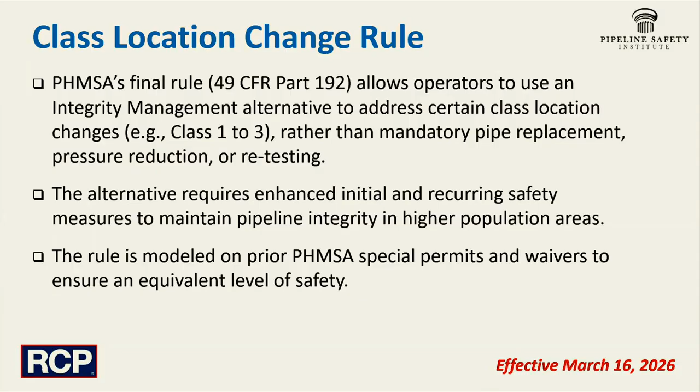So this alternative requires a lot of those baseline and recurring safety measures to maintain that pipeline integrity as the population increase has encompassed a previously designed and installed pipe. There's also these eligibility requirements for that applicability that we'll talk about. But first, I'll turn it over to Derek Wallace.

Thanks, Chris. I'm sure all of y'all are aware of most of our class location classifications, but we figured we'd give a little refresher on what some of those thresholds are that change our class. For our class 1 pipeline, we're looking at 10 or less buildings intended for human occupancy in that 660-foot buffer. For our next jump, it'll be our greater than 10 but less than 46. So you start hitting a little more urban areas.

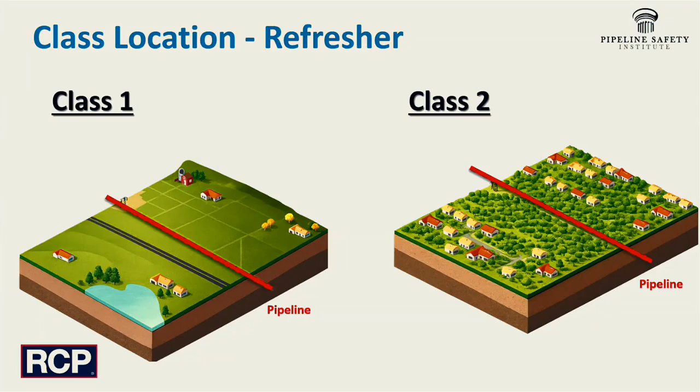And we'll jump to our next slide, in which we'll see our class 3, which is going to be more than 46 buildings intended for human occupancy, or if our pipeline lies within 100 yards of a well-defined identified site. So this could be a playground, recreational area, outdoor theater, a place that is occupied by 20 or more people at least 5 days a week for 10 weeks in any 12-month period. So obviously those weeks don't need to be consecutive. And as always, whoever's doing your analysis should verify occupancy on some of these buildings.

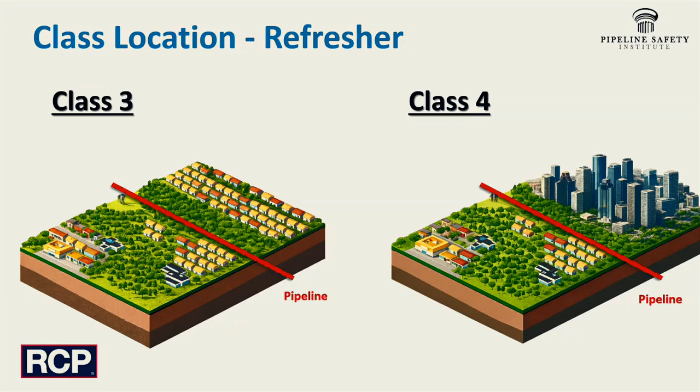Another one is our class 4 areas, and this is going to be our downtown metropolitan areas where we have 4 stories or greater. That'll bump us up to class 4. Then we'll jump over to an example we have of a class 1 pipeline. This is located just outside of Houston in Katy, Texas.

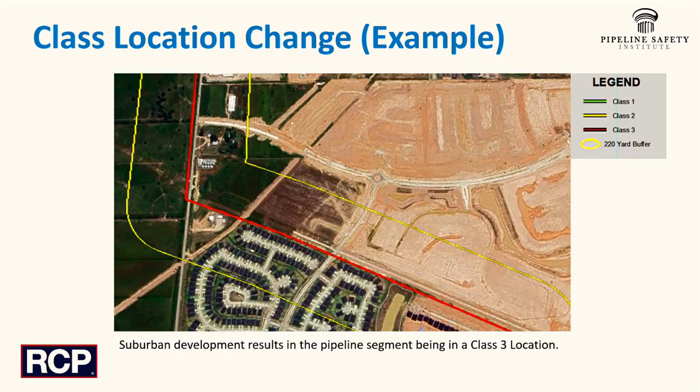And as you can see, whenever this pipeline was constructed, we were in fields and farming land. Then fast forward, as growth occurs, we're now dead center in a growing master plan community. So these changes happen quick. And luckily with this change that Chris will get into in this next slide, it allows operators some options. So I'll hand it back to Chris.

Thank you, Derek. Yeah, that change from class 1 to 3 happens rapidly. And that's what the special permit process was designed to address. And after 20 plus years of experience with it, I'm glad that PHMSA was finally able to codify this new section 192.611(a)(4). So we had a great example there of a class 1 pipe designed, installed, operated for some time at a 72% design factor for a class 1, but then it rapidly incurred a class location change. In this case, it was the top line going straight to a class 3.

And so the previous options were to reduce the MAOP per 192.611(a)(2), replace the pipe, or get a special permit. Well, that's now been replaced with the new 192.611(a)(4) method. Also, some areas incur slower change and may end up going to a class 2, and operators will typically pressure test their pipeline to the one class above pressure requirement. In this case, the pressure test was conducted to 1.25 times MAOP. And that's really the basis of a lot of this rule. That's another requirement, that the baseline pressure test per Subpart J be to 1.25.

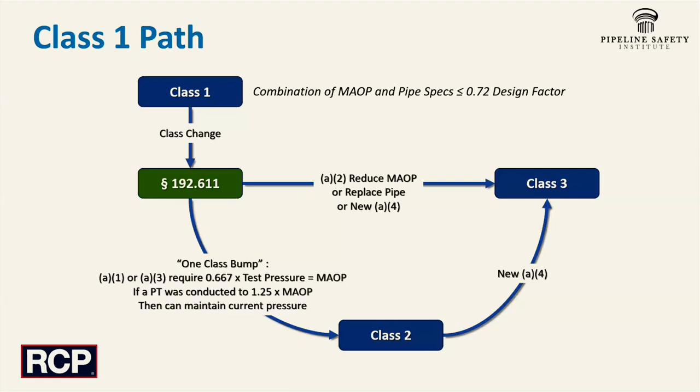Well, in that case, the operator could have taken what's known as a one class bump and maintained their current pressure as it went to class 2. But now as it grows more to class 3, they must implement the new (a)(4) to maintain their pressure. There's also some pipe designed to class 2. And if they incurred a population growth and a class change to class 3, there's a few methods that they could use to accommodate that.

The first one being the central line, which would utilize the new fourth method: I had a pressure test greater than 1.25 MAOP, and I could use the new 192.611(a)(4) methodology to get to a class 3 operation. Or if it was designed to class 2 and they had done the pressure test to 1.5 MAOP, they could utilize the one class bump and maintain their current pressure up into class 3. The other option, if they didn't have the 1.5 pressure test, is to reduce pressure commensurate with the design.

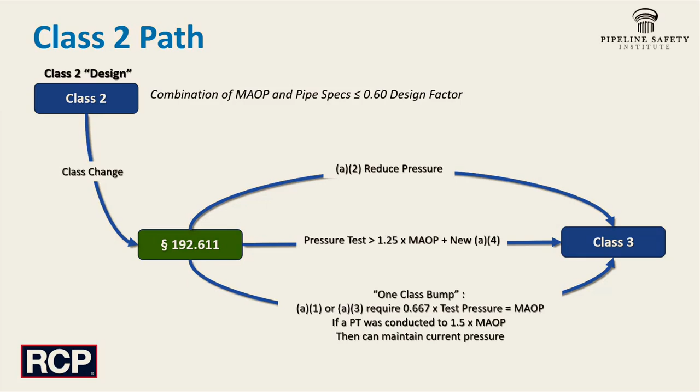So to get into this program, for it to be applicable, we have some new definitions. And I think within the rule, it talks about this gateway into the rule, and the reason the rule is designed the way it is. It's very efficient, and I think that's a really great thing. We are due some simplified, more efficient rules.

The first thing is that this eligible segment is going to be capable of being assessed with an inline inspection tool. It must be piggable. So we talk about a class 3 inspection area that's from the upstream tool launcher to the nearest downstream tool receiver. And so it must be able to be assessed by ILI.

Really, the improvements to the integrity management rule in Subpart O in the last 6 years, ending in 2022, and a lot of the success of the special permit has been the continued improvement of inline inspection to identify axial flaws, crack-like defects, and other integrity concerns, and remediate those prior to their resulting in a failure.

Some of the things that are not able to be utilized in this new rule to become an eligible class 3 segment is mainly done by omission. It can't be bare pipe. Bare pipe has never been considered part of an acceptable pressure upgrade as class has increased. And wrinkle bends. Wrinkle bends are very difficult to inspect with ILI, if not at all improbable to be able to detect the appropriate defects.

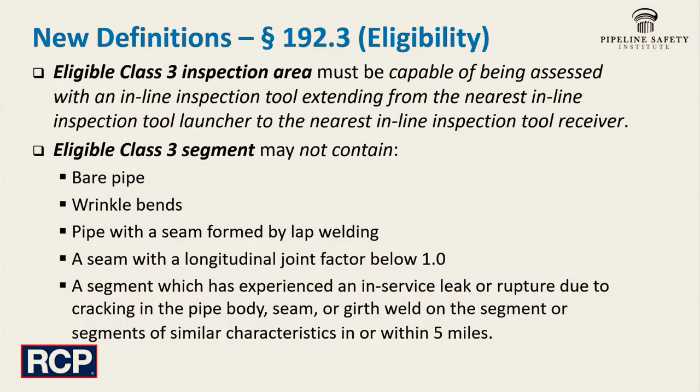And you'll see the effect of leaks and ruptures on this rule extensively towards the end of this discussion. Again, these criteria have been shown to be effective and provide safety in the fact that no in-service leaks or ruptures have occurred on segments managed under the current special permit process.

So let's look at A4. It's the new method. First off, it will be included in Subpart O in your integrity management program. That includes the risk assessment, the integrity assessments, remediation, and other activities that go on normally within an integrity management program. And then there are initial requirements, and here we start seeing the dates again.

So we have effectively 2 years to perform the initial requirements on a pipeline that has experienced this population growth around it and going from a class 1 or 2 to a class 3. Or within 24 months of the date of the class location change, whichever of those is later, an operator must complete those initial program requirements. And then following that, there's going to be recurring requirements, such that after the 2028 date, the operator must comply with these following programmatic requirements.

So we've got the integrity management program, then we have initial requirements, there's 8. Then we have recurring requirements. There's 9, and those are the things that we're going to have to be most conscientious about. Here are the 8 initial requirements.

We have to perform a baseline assessment using an ILI tool and remediate all the identified defects. And we'll talk about some extra remediation requirements. But those immediate and 1-year conditions must all be remediated prior to the end of that 2 years. We must confirm we have a pressure test or perform one to at least 1.25 MAOP per Subpart J, all the requirements of it, 8 hours, etc.

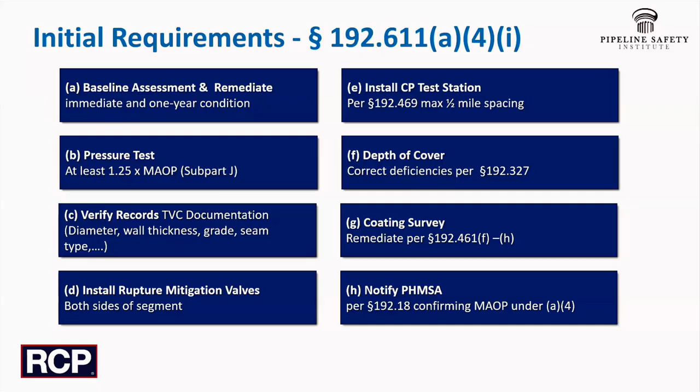Excuse me again. So those are the initial requirements. Then we have recurring requirements. The code is laid out fairly efficiently. I had A41 initial, A42 is now my recurring. And there are 9 of these recurring requirements. We'll look at some of the differences between this requirement and the current code in a little bit, but let's talk through them to start with.

Gas quality requirements: there are limits on water, CO2, and hydrogen sulfide, similar to FERC requirements, to minimize the occurrence of internal corrosion. And to follow up on that coating survey I performed, I need to do a close interval survey every 7 years. To deal with the damage prevention issue, right-of-way patrols are each month. Leakage surveys are required at least 4 times a year.

And again, for damage prevention, the idea was that installing line markers visible from the previous and the next would ensure that excavators and the public and others knew where the pipeline was going. So that's a line of sight requirement.

Clear shorted casings within 1 year of identification. That's both the electrolytic and metallic direct shorts. There is some discussion here, if it's not feasible or practicable, that some justification may be provided on what mitigation actions may be taken. But those would need to be justified and documented pretty specifically.

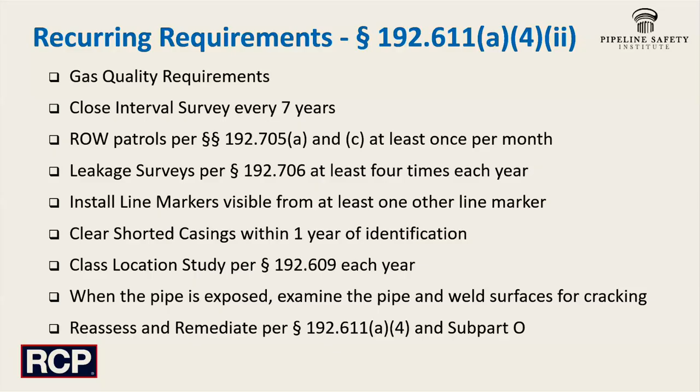So let's look at these recurring requirements and see how they compare versus previous requirements. This is where change would need to occur in the procedures for these specific segments. Gas quality has prescribed limitations now in that eligible class 3 segment, versus the determination by the operator that corrosive gas is not being transported, or if it is identified, that investigation and steps have been taken to minimize internal corrosion. There are prescribed limitations.

The close interval survey is prescriptively at 7 years, whereas previously it was when needed to evaluate the effectiveness of the CP. For patrols, once each month, versus previously varying for class 3 location from 4 times a year to twice a year. Leak surveys, 4 times a year for that eligible class 3 segment versus twice a year previously for a class 3 pipe.

Line markers are now line of sight rather than having more performance-based requirements. Shorted casings, instead of clear or monitor based on the O&M procedure, must be cleared within 1 year of identification.

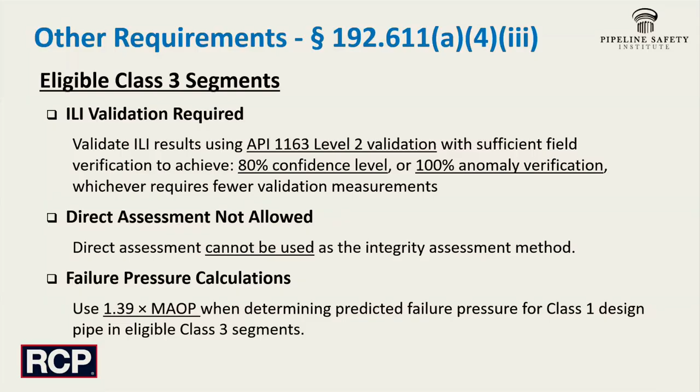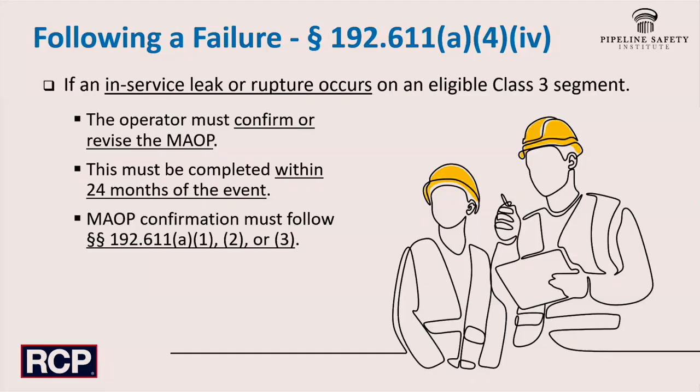We talked about records a little bit, and these are for the life of the pipeline. And similar to the IM rule, it requires that justifications and other actions be documented. And I think with an eligible class 3 segment, it would probably even get a little more scrutiny. And those requirements are in 611A4. But when I see this type of a requirement, and we talked about 2 initial requirements, the CP test stations and depth of cover, and 2 recurring requirements, the line markers and the shorted casings.

I think when moving through those, and possibly even some of the others, an operator would be well suited to create some sort of a position paper and/or procedure about how you are going to work through any issues you might find with this particular requirement. And I think that really saves a lot on the front end on the justification, and it ensures consistent application of the process you're employing. And then it's on a case by case or scenario by scenario basis that we must develop and document those actions for that particular case. I think that would really save a lot of missteps and confusion on the front end.

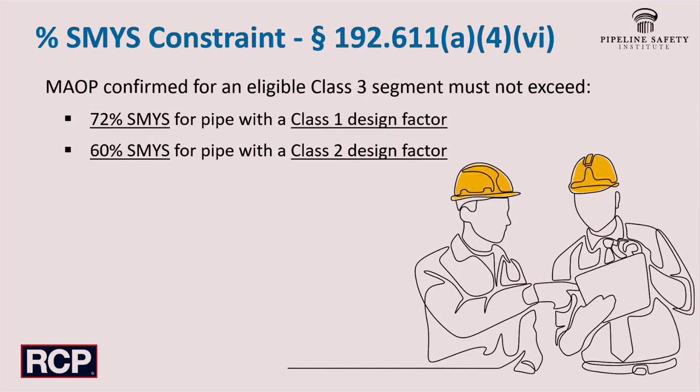Sort of the last programmatic constraint, as we've been going through these last few slides, is that it's for transmission only, fairly obvious. You can only apply this MAOP confirmation fourth method to gas transmission, eligible class 3 segments, not for gathering or distribution lines.

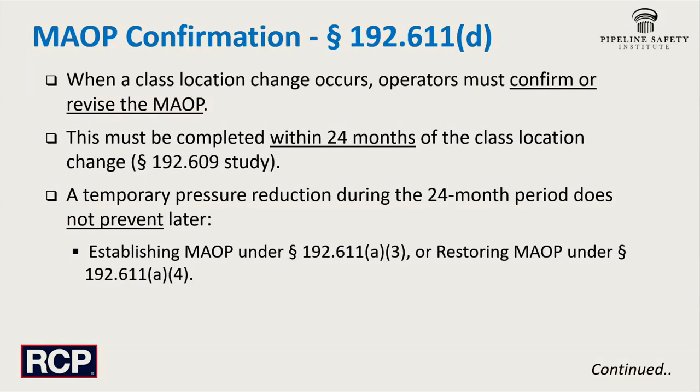So if we've taken that pressure reduction, we're now going to have 2 years to be able to go back and look at that pipeline to see if we can restore the MAOP per 611(a)(4). And if we do choose to try to restore that MAOP for an eligible class 3 segment, one where a pressure reduction has been taken in the past as the pipeline moved from a class 1 or 2 to a class 3, within the next 2 years an operator must comply with the uprating (b)(1) and (2) on the pressure test, records review, making sure the pipeline's suitable, and then if the pressure is upped, per 192.555(e), that pressure is incremented slowly and safely.

You must meet all the Subpart O requirements for the MAOP increase. So thoroughly review the integrity of the line, look at the records, look at previous pressure tests, and any inline inspection results and repairs that need to be made, an overall integrity evaluation, and then complete all the initial requirements, 611(a)(4)(i), by March 16th of 2028. And then you would have an eligible class 3 segment. If those were all successfully performed, you could then move into the 611(a)(4)(ii) recurring requirements.

So we can see the timelines on these are fairly quick. It kind of keeps with that 24-month idea that once I identified a class location change, I had 24 months to do the study and do something about it. And that was retained in this rule in terms of getting those baselines done and then starting your recurring. So that concludes our webinar on the MAOP restoration.